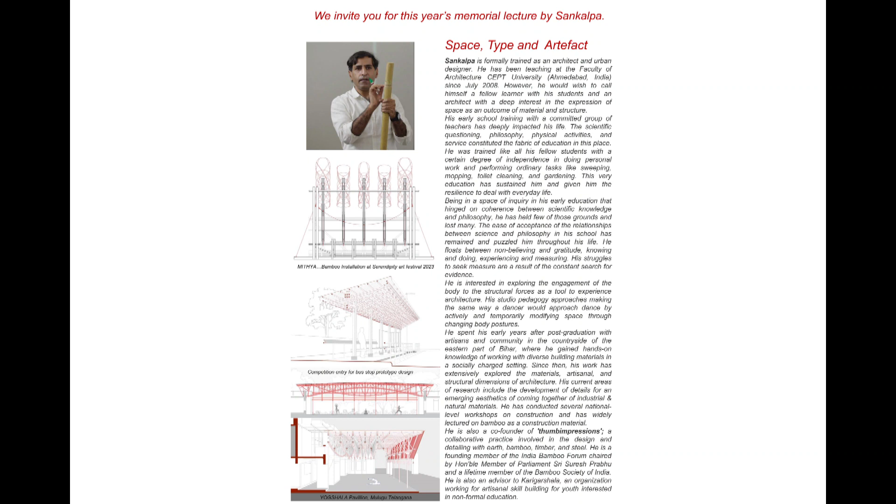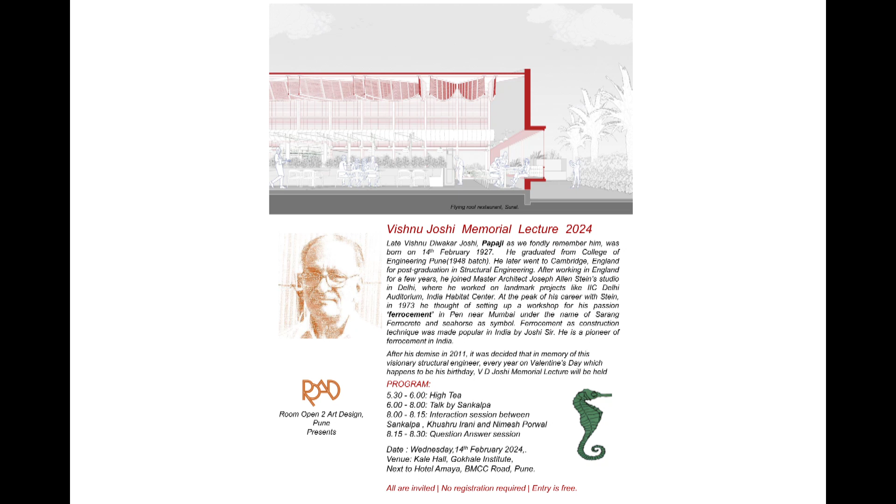We have today with us Sankalpa as today's speaker. Sankalpa is formally trained as an architect and urban designer. He has been teaching at the Faculty of Architecture, CEPT University, Ahmedabad, India, since July 2008. However, he would wish to call himself a fellow learner with his students and an architect with a deep interest in the expression of space as an outcome of material and structure. He is interested in exploring the engagement of the body to the structural forces as a tool to experience architecture. His studio pedagogy approaches making the same way a dancer would approach dance, by actively and temporarily modifying space through changing body postures. He is also a co-founder of Thumb Impressions, a collaborative practice involved in the design and detailing with earth, bamboo, timber, and steel. He is a founding member of the India Bamboo Forum, chaired by Honorable Member of Parliament Sri Suresh Prabhu, and a lifetime member of the Bamboo Society of India. He is also an advisor to Karigar Shala, an organization working for artisanal skill building for youth interested in non-formal education. I will now please request Sankalpa to take on the stage.

Being present in this wonderful evening.

I'm especially very happy and surprised that today I have a special person, Dr. Malay Patel, a client. He's a famous vascular surgeon who flew all the way from Ahmedabad to listen to this lecture. I'm extremely grateful, sir. I don't think there's a better way to acknowledge that. I acknowledge the whole ROAD team that they invited me. Thank you, Professor Joshi, Prasanna, Nimesh, and everyone else who organized this.

There are two parts to this lecture. The first part would be where I would be reading, and the second part would be where I would be showing you the work. There is a reason for it. Architects should not present their work in a format that glorifies them. It can be presented as a description of the attempt or what has been done. Critics and researchers' job is to analyze and present their findings. In a forum like this, a salesperson's speech is the least you'd expect from me. Therefore, my job here is to take you on a journey of the intellectual concerns we deal with today in academics and practice.

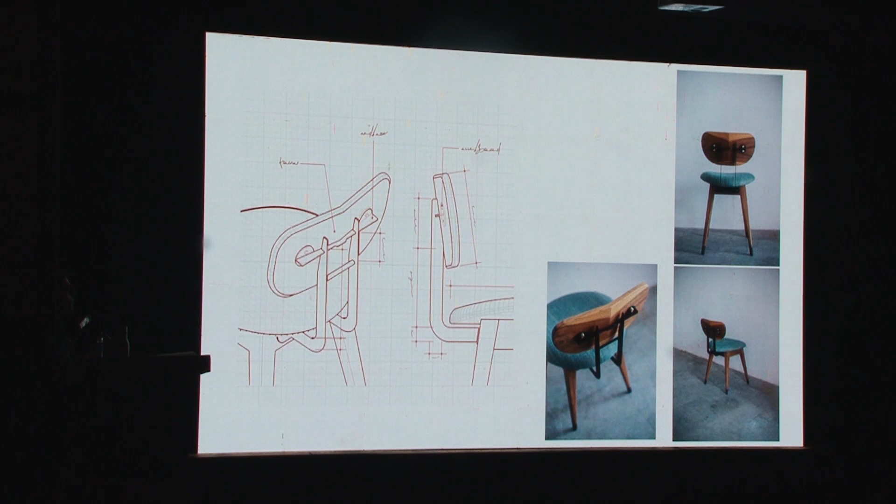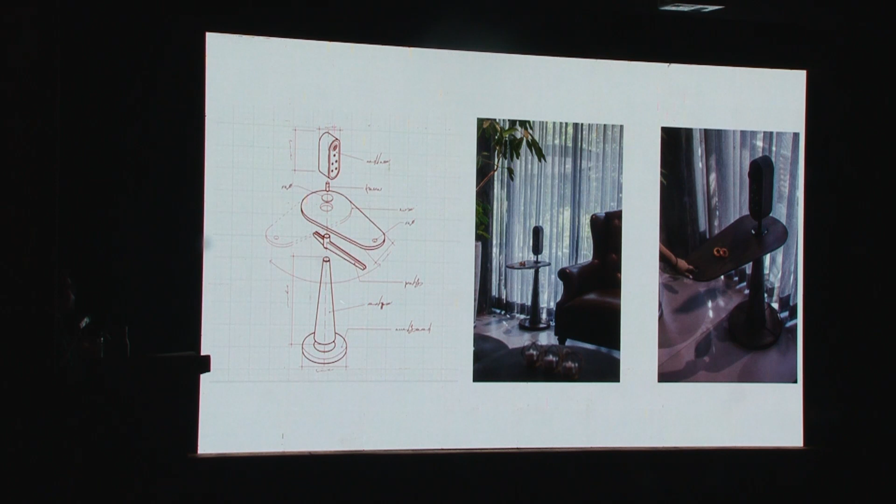As I said, we are constantly trying to explore the relationship between construction, structure, and material. If you look at the way steel is handled, steel is supposed to give us far more elegance than when we use timber. So the mixing of steel is purposefully done to make it lighter, and obviously it needs to ergonomically work. These are some other examples of it. If you can look, we do get into mechanical details wherever it is necessary. This is a swing that has become suddenly quite viral across the world now.

We had more than 1 million views of it, and we have got now so much interest across the globe to get some of these things.

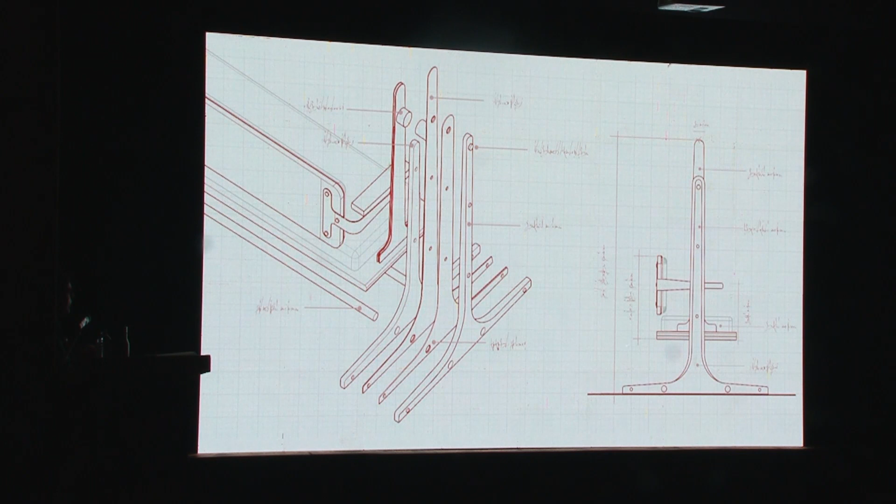Basically, it's a combination of timber and steel. Steel is a very good material to combine with natural material because it's isotropic, and isotropic materials work very well in all directions. Any natural material is generally not as good isotropic as steel. As you move from steel to timber to bamboo, it becomes highly anisotropic.

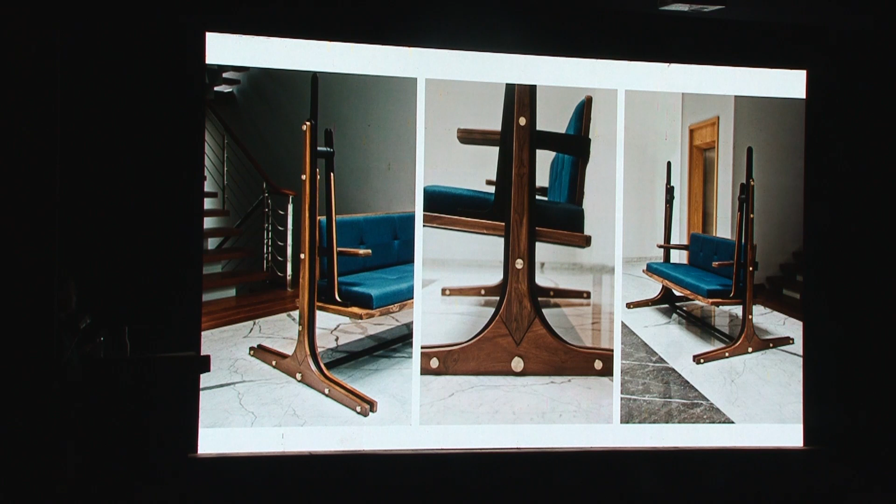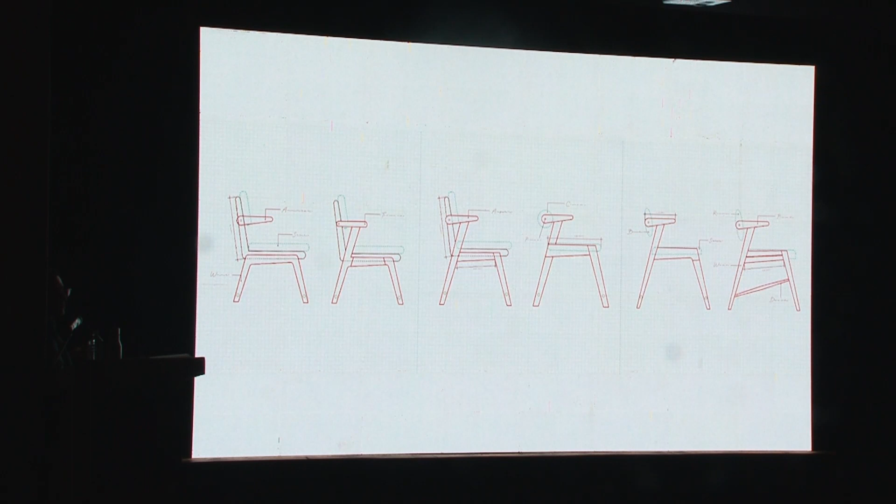Some of the work we have been doing in furniture includes a quite famous chair, becoming so popular that we've tried producing 200, 300 versions of it. It's basically a work desk where the back part rotates, so it's called a beak chair. This part rotates and creates a lot of comfort. It's generally used for both dining as well as study purposes.

There is another kind of exploration where we push the limits of the material, trying to make it cantilever in a reverse way, opposite of how you'd generally find it. You can see a gap between when you sit, and how these angles are worked out for ergonomics.

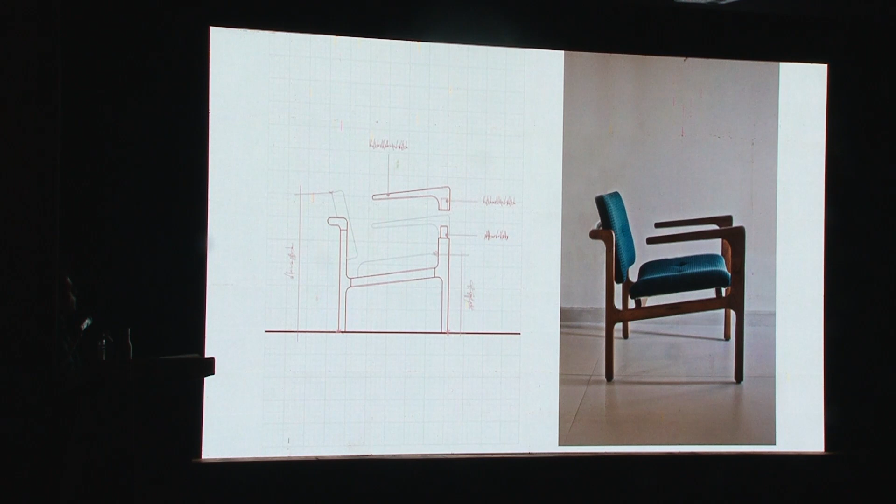These are some of the works we've been doing - swings with brass, worked out with very good mechanical joints. You can shift sides from one to the other.

This is another very popular chair. If you look at how it connects, you can also imagine why not the other way around - it's up to you to think about whether this is more correct than the other way. So these are some of the works we've been doing in comfort zones.

This is for the Taneira showroom in Delhi, where we gave some of the furniture in the showroom. Dharmesh Bhai was its interior designer.

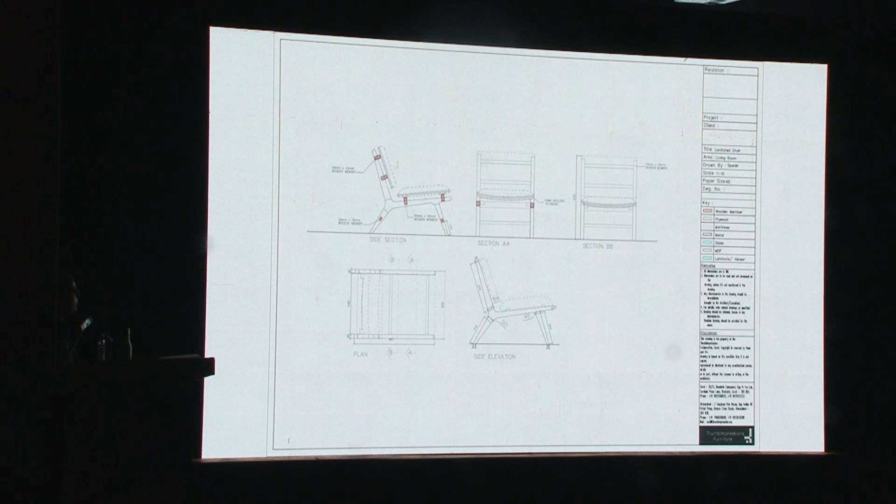Some of the way we produce drawings in the office for furniture is something like this. And this is a workshop where there are templates - our artisans still sit on the floor and then work it out.

Our other wing - the first wing was furniture, the second wing is the execution wing, called Thumb Impressions Build. We generally do construction in earth, lime, bamboo, and so on - anything which mainstream contractors will not do. That's what the Thumb Impressions Build wing does.

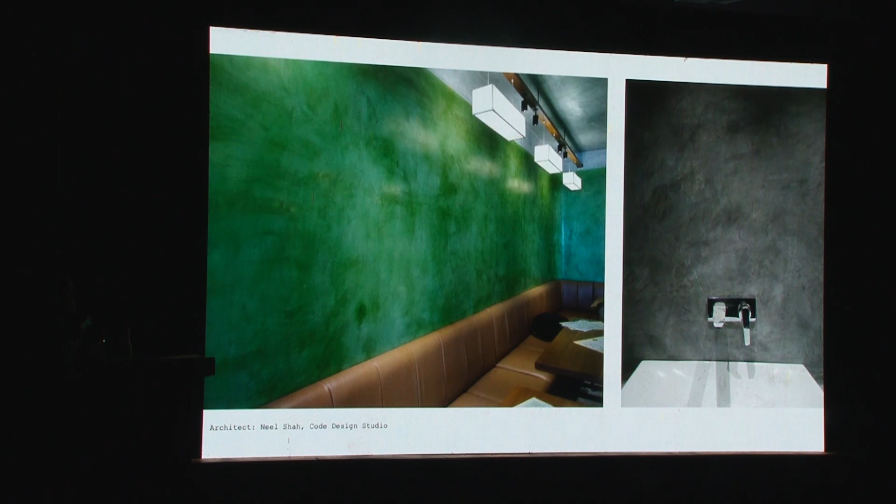This is all lime plaster of different versions that has been worked out. There are some precast works that have been done. This is rammed earth over stonework in Jaipur. This is poured earth work we did for Studio Bus Ride in Goa - these are poured earth, and they wanted color.

We do lime plaster works like some of the work you can see here. It's quite labor-intensive work, but we use very good quality lime. It takes time, but you get a very good result - some of the quality work you can see.

There is something called Tadelakt, which is much more waterproof. We do this for toilets or places where water is a problem.

Now we move to the architecture part of Thumb Impressions. As I was speaking about the type, I thought let's put some of the plans we have worked out and re-look at it from the perspective of what is changing or what remains constant as a type.

For us, there are some residences which are built, some which are still in design stage, and some which are about to begin, but we have put some of the plans. This is Malay Bhai's work, which is still going on. This is work that is supposed to start, and these two are work already on ground, and this one is already completed.

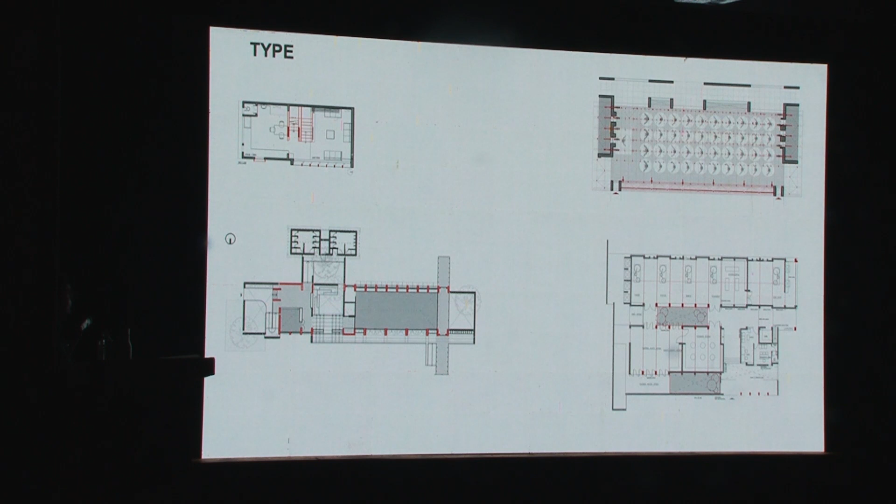If you look at this, this is a restaurant we recently worked on. The brief was that it needs to be dismantled in 10-15 years - it's on lease. So everything was steel or a material you can recycle or return back as far as possible. But again, if you look at it, there is an in-between space, and then there are these relationships.

This is a residence in Kota we are doing. This is the first time we are working with a situation where at least 3 sides is where movement happens around the court. One of the problems is that resolving a court is a very difficult thing - to bring it in and resolve it becomes very difficult. So we have still not reached a point where we have all 4 sides worked out. We have got 2 sides worked out, now 3 sides. We have not reached a level with 4 sides.

Now, in this case again, we have reached a point where there is this court, and a movement which traverses here, and this is open to sky. And these are the 2 relationships that you build.

This is Malay Bhai's house, he is present. In his case, there are 2 open spaces dispersed outside onto the 2 edges because of the nature of activity wanted. On one hand he wants this to be exclusive, at peace, pristine, silent, and on the other hand he wants this to be public. So if you look at it, this is again a closed space, it almost tucks inside, goes and hides itself outside, whereas this completely opens up. So one becomes the public, and then there are smaller open spaces which are worked out.

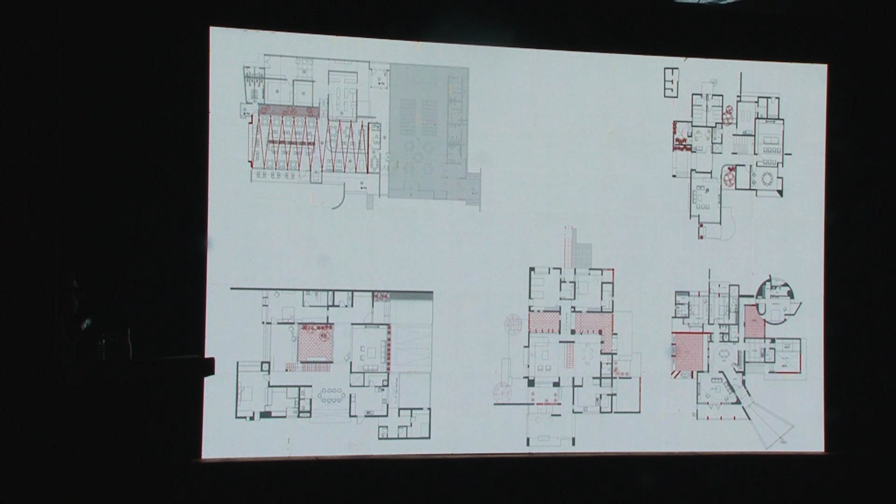So this is the Yogshala project. As I was discussing earlier, every time we are doing a project, the program and the structure are almost more simultaneous than the material. For us, what is very important is the span, because it's the span which has far more freedom than when you are working with enclosures and bearing members. Because when working with bearing members, the plan and organization starts working, whereas when it is span, you are far more free.

Let me explain how it works. Bamboo has low modulus of elasticity and high tensile strength. Because of low modulus of elasticity, you will hardly find a bamboo structure which is straight - most bamboo structures are curved. You make it into a curve, in spite of high tensile strength, because you don't want to deal with low modulus of elasticity. It's very difficult to deal with.

So in this Yogshala, apart from the idea that it has to have an expression, there is an arch here, this one, and this one - if you see, it's an independent truss which has got a slight cambering. The cambering comes out of the on-site experiment.

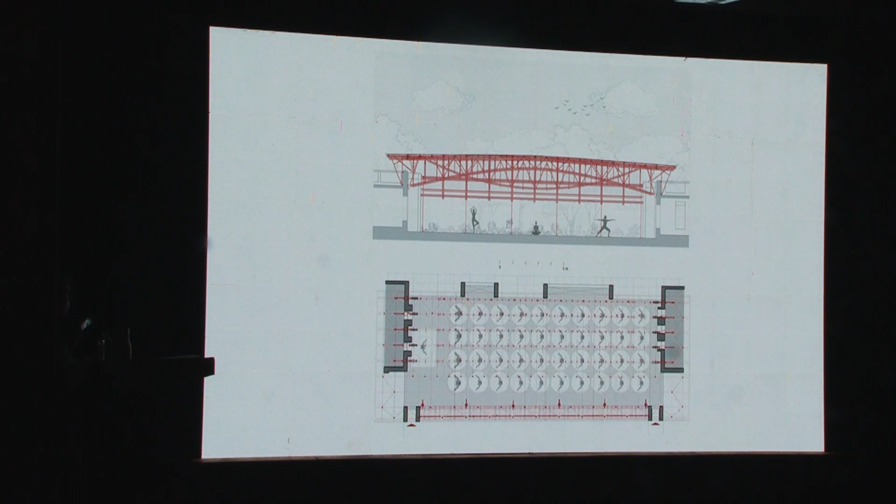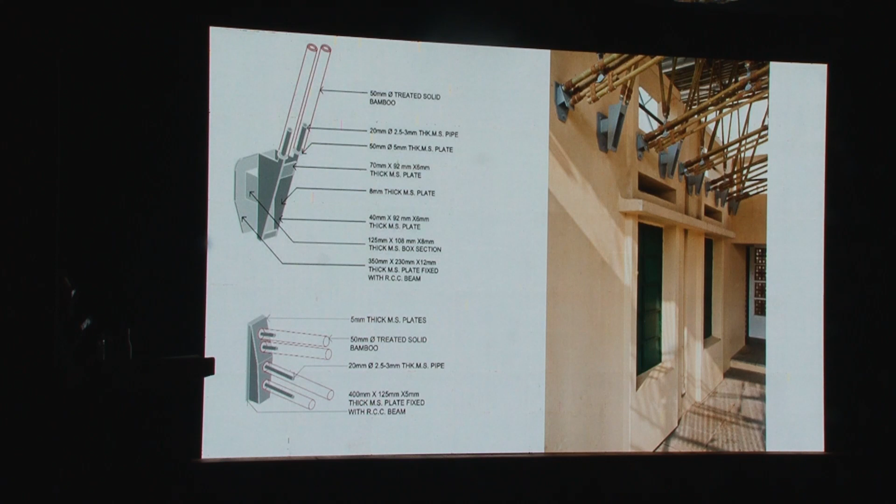These are some of the details. I'll explain further. These are all customized details, because one of the areas we are working on is trying to standardize a fastener system in bamboo so that it can be used more freely in urban areas. So these are some of the details showing how we are working with saddle details, etc.

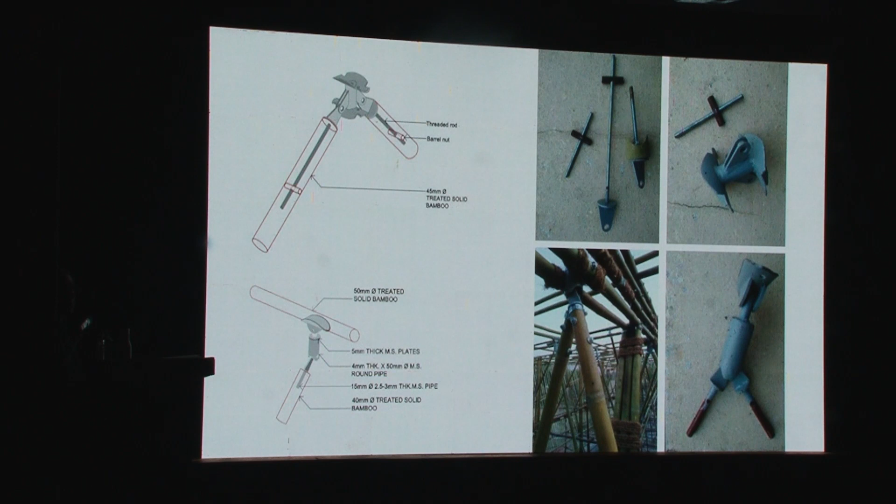This is this detail. These are for when you are combining two bamboos which are coming at an angle, but you have created a movement because you need some tolerance to work with bamboo. Bamboo is not perfectly straight. So this is what the section would look like.

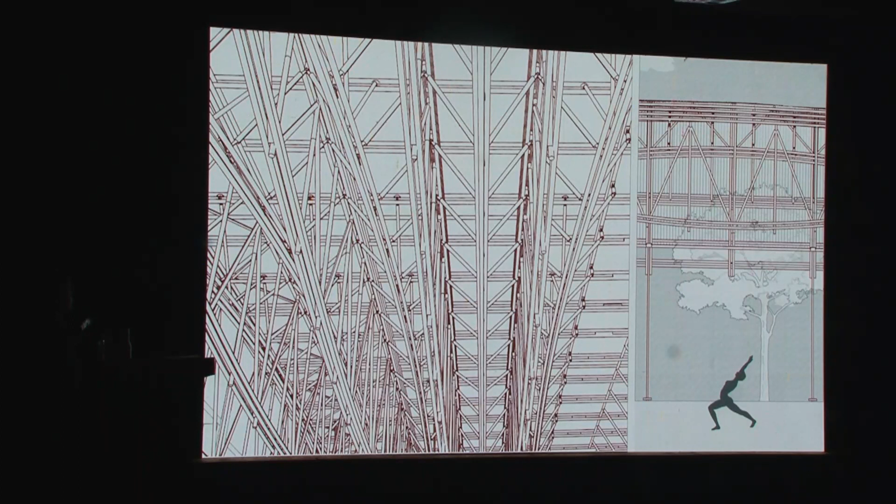This is what you can see, and this is what you can experience. Now let me explain here.

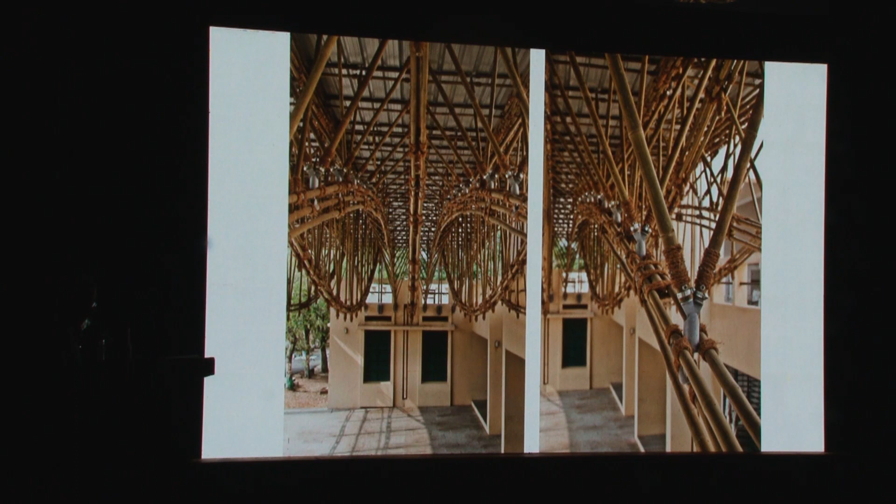This arch is a redundancy that has been added to the structure. It is not working right now. It will start working when the truss system starts sagging. So one layer of precaution is by creating a cambering, and the second layer is by adding redundancy through the arch.

From the top chord of the trusses, these diagonal members come and rest on the arch, and that's what you see as the poetics. So it emerges from the logic of the structure, and at the same time from the demand that we need to make something like this, and also from a program.

Architects are compelled to write. We have been also compelled to write. So there is a logic that we have tried to weave between yoga and this, which I'll not explain right now because I'm trying to explain the thought process going on behind it.

It's around 74 feet, around 23 point some meters — one of the largest spanning structures in bamboo in the world. I mean, at least among the top two or three it should be.

And then of course to connect differently, so these are abstract, but if you see, these are yoga postures, used to connect symbolically to people who otherwise would find it difficult to connect with abstract ideas.

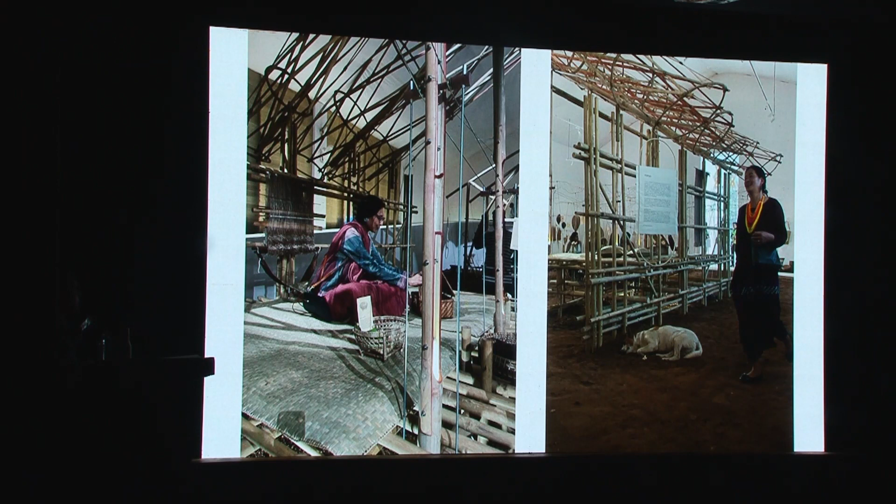Now there are other things also here. Let me see if I will draw it. I'm surprised. Okay, I think I'll come back. There would be some images of that.

This is a project which is work in progress all the time, because it's an NGO campus and they keep on raising money to make it. So every time they raise money, they do a little bit more. Again, it's a bamboo structure, and this is a truss, but the span is less, so we don't have to cross-triangulate it. So this is the quality of space that you get.

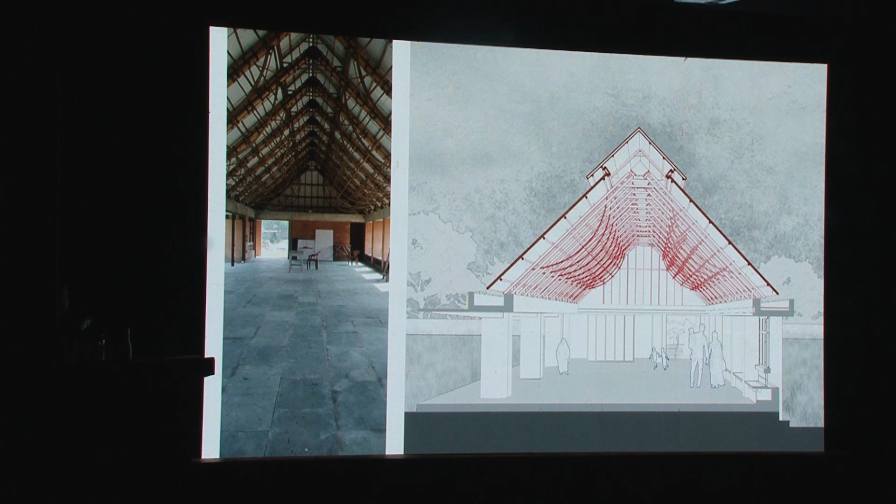Now there is careful consideration, because we are thinking about how to manipulate the plan to create a different span at the top. Because the moment you increase the span here, your beam depth is going to change, otherwise it will be compensated by reinforcement. So constantly we are trying to figure out how to integrate this, and that's how it gets integrated.

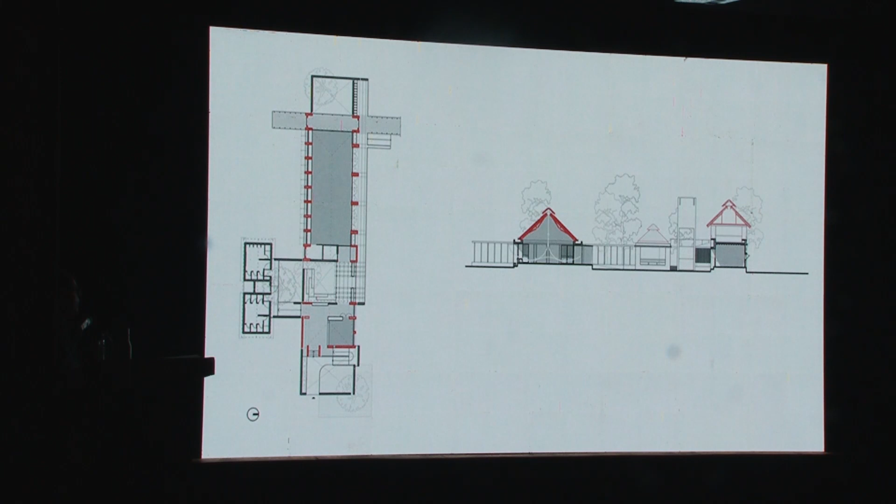And then you see the expression of it. So in this case, it is integrated through reinforcement and not through the depth of the span. The depth of the span remains constant here to work with other logics. Also, on the end, we have cross-bracing because it's a region of seismic zone 3 and also a region of high wind velocity.

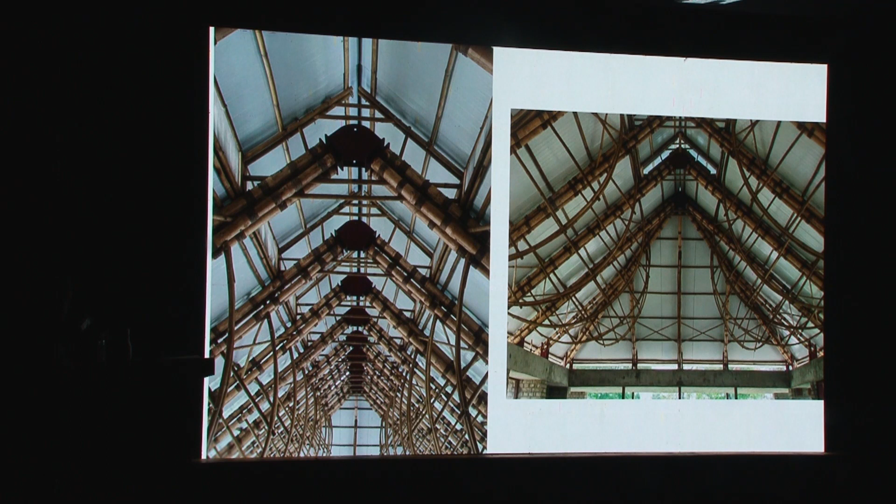This is our interest in trying to utilize the tension property of bamboo, because the tension property of bamboo is as good as steel, but the problem is that the lignin which binds the fibers of the bamboo is weaker. So even before you are able to extract the maximum tensile strength of the bamboo, it will fail in joinery. You will never be able to gain the maximum potential of it.

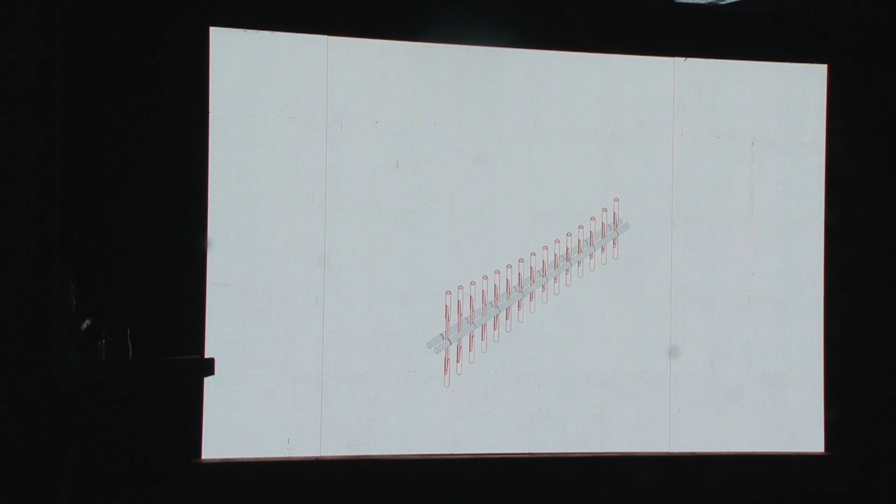And then how do you engineer bamboo? How do you develop its components, other parts of it? So you see now the relationship here - the vertical member, and then the cables that are going, which are made out of splits. That's all the details. If you look at it, there is also a detail here where there is a bolt and it is touching a line. It's not touching this part.

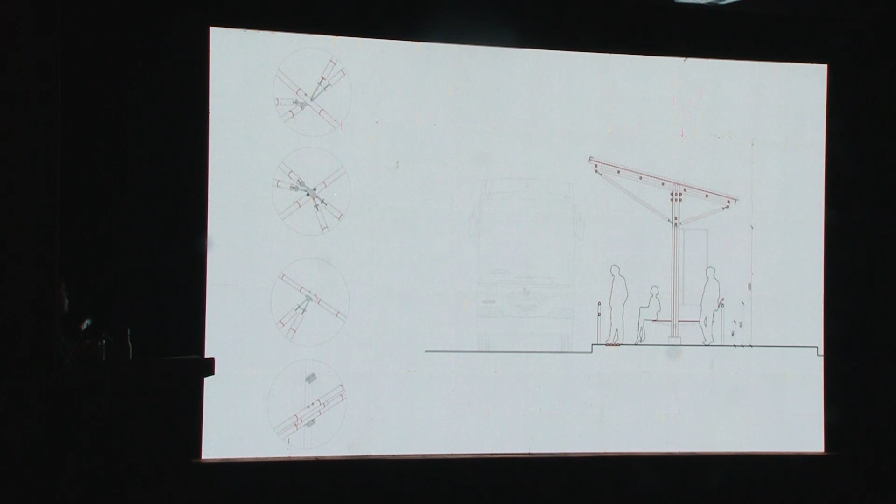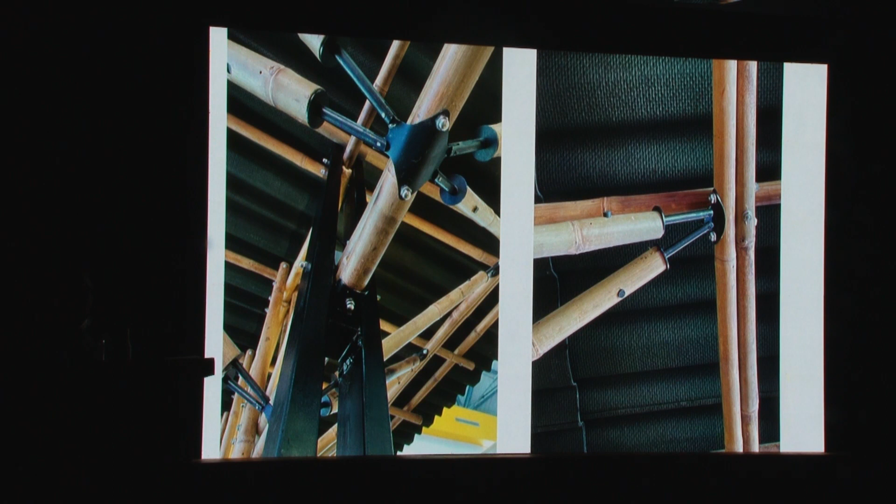This is another attempt to put bamboo in an urban infrastructure project. This is a workshop which we did for Triple ID, and it was inaugurated by the Hyderabad government during that time. If you look at the details - this saddle is worked out based on the diameter of the bamboo. So you have washers of 12 number, 14 number, etc. You can have a saddle of these numbers, and based on what bamboo you select, you can bolt it and standardize it. So no customized joint is required to make this bus stop.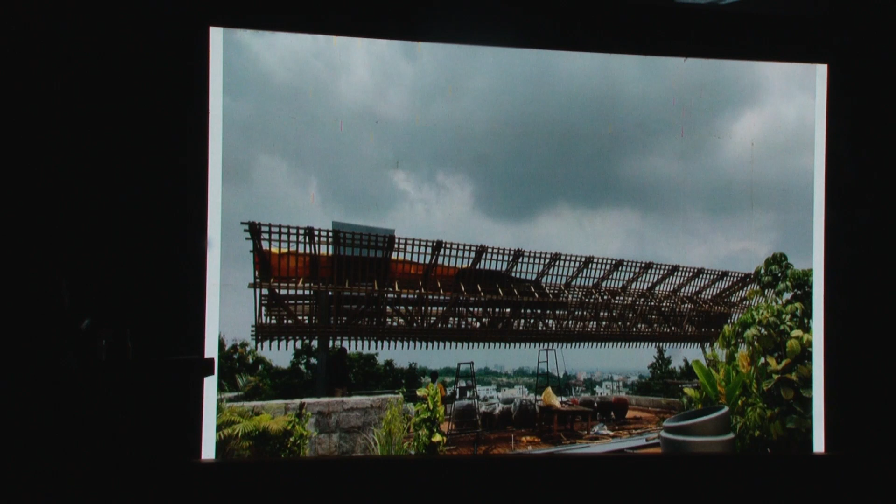Though we had also given a proposal for the council, but it didn't work, I think. This is a structure where we failed - a 13-meter post-tensioning structure in bamboo, which we post-tensioned using steel. What was happening is we were not able to balance the CG, and so it toppled towards this side with a deflection of around 20 mm. If you look at it, it is pulled by cables, and they are all highly engineered.

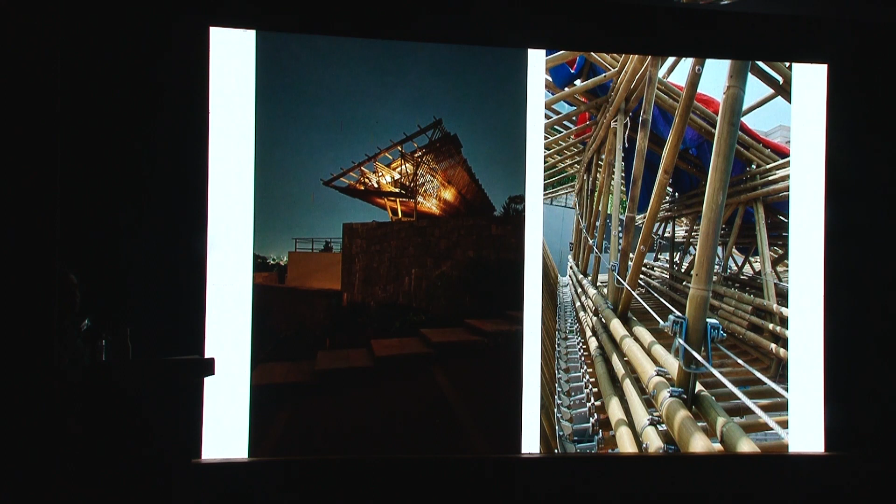If you look at all these details, all are customized. We customized all the details, worked out, but that was very unfortunate that we could not work it out, and the client didn't have that much patience to take it, because sometimes if you take a leap of faith, there are failures that will happen, and unfortunately we failed in this.

This is another roof which we are doing with Hunarshala. This is Hunarshala's office for which we did an R&D. I'll explain, and then there are a few images. This is a rafter - the rafter will bend like this. If you leave it, it will sag like that. Now there is an independent arch which comes here. You can see they are not touching.

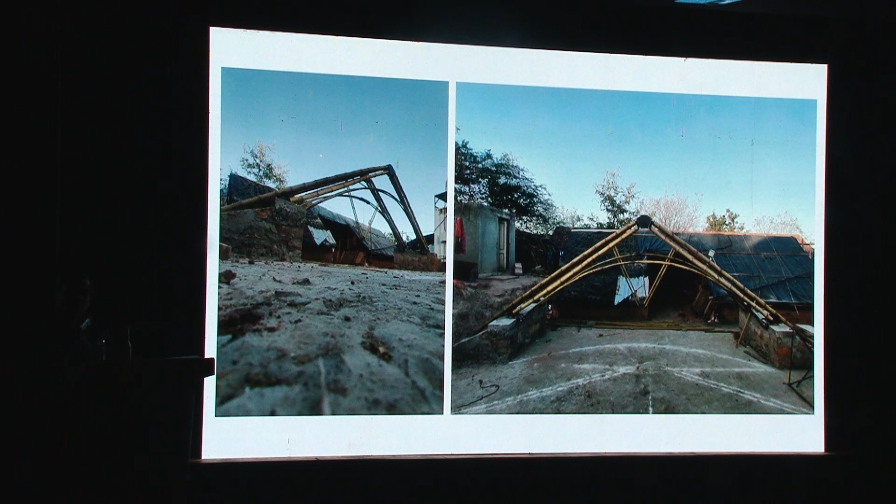And then there is this vertical member which is sliding between the arch. It is connected to the top rafter, but it is not connected to the arch. When it goes here at the bottom, from here there is a tension member which goes and connects to the arch. So what happens is that when there is sagging, redundancy is again built into the structure for future failure. Once it starts sagging, the tension starts working, and then the compression member eventually starts working. So it's an indirect load path that sort of works here. And so you get a space like this, and a space like this. The roof is inclined - we are still to document it.

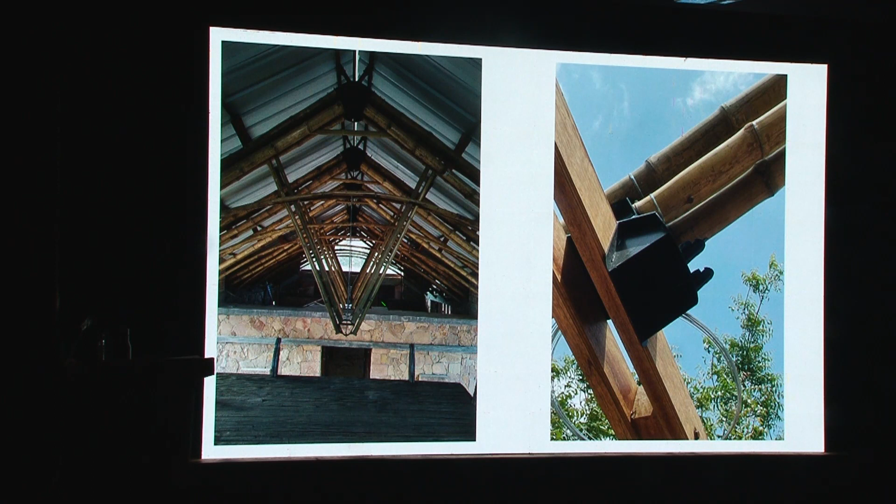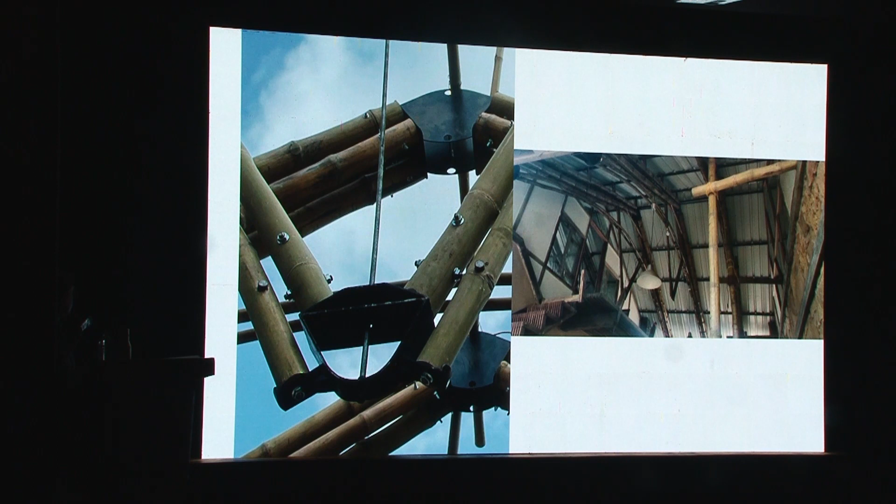And these are some of the details - again, all customized by us. The thing is, because bamboo diameter keeps changing, we have worked out a width in a way that it can change, whatever. It doesn't matter because of the nature of relationship that we have built between the curve and the square form.

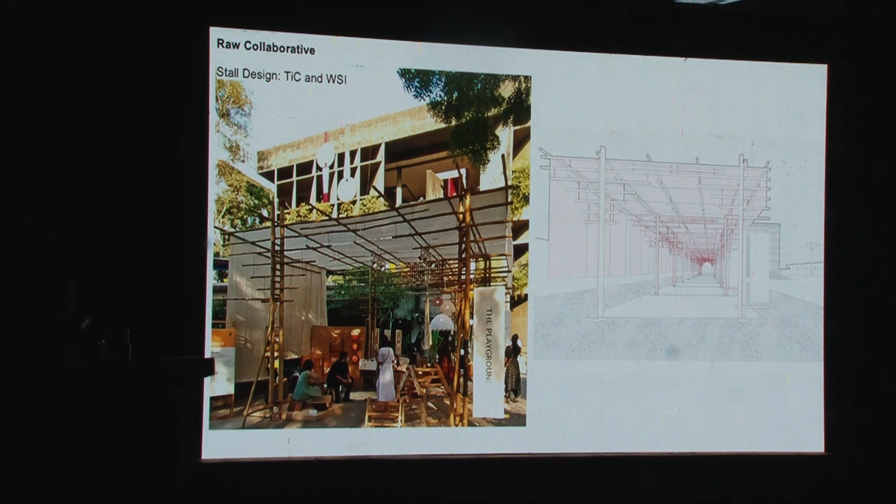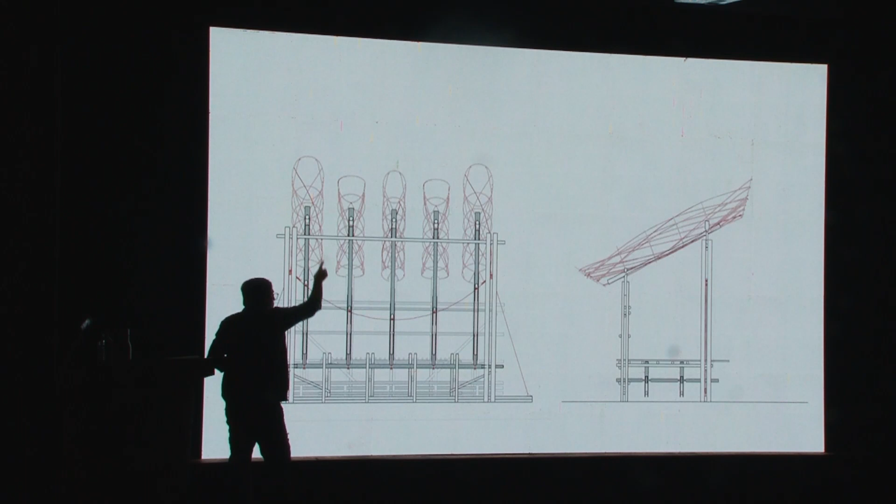Just give me one minute, I'll go close by to explain this. You see that this, if you look at it, is a beam. The bottom member, the top member, and this combines, and all of this is a beam.

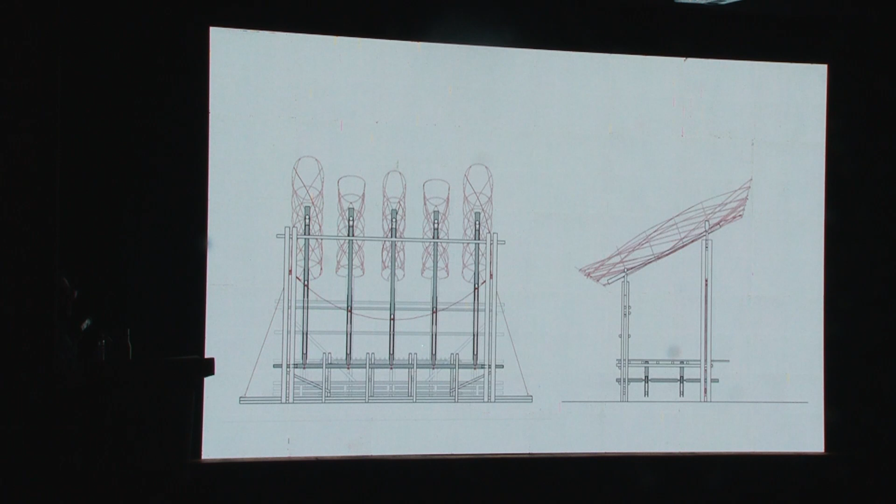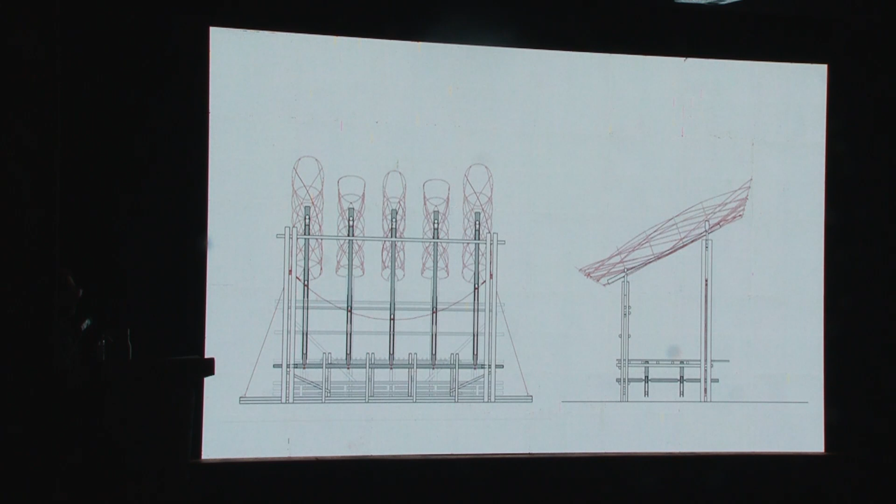Now what happens is there is material that we have removed from the vertical member. The moment you remove material, it becomes weak. What we have done is taken rods from here, connected it to the tension member, which is a cable, and connected it back. So there is a pull force from the down to take the load onto it. So it works both as an enclosure as well as a force diagram.

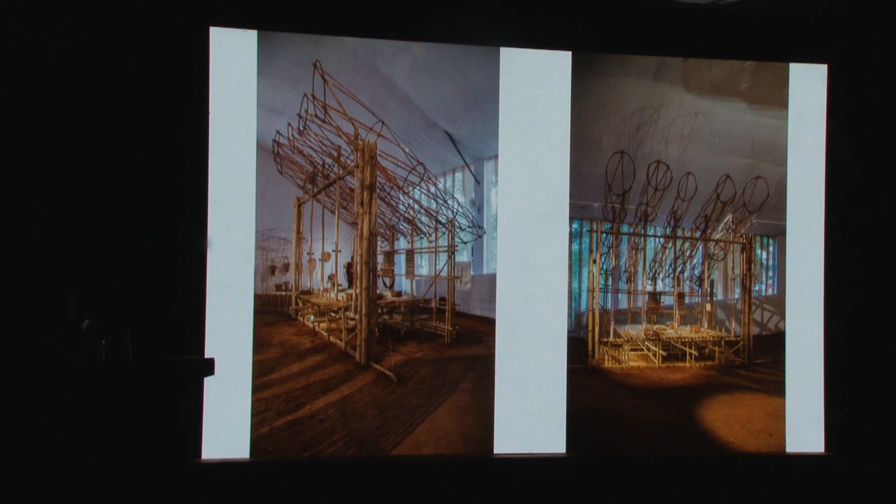So if you see this, you can see the path of it. There are more details I'll show you. This is the bottom portion from where this rod comes in. This is the material that has been removed, and this is how the connection happens before it is taken to the end and then anchored to the ground.

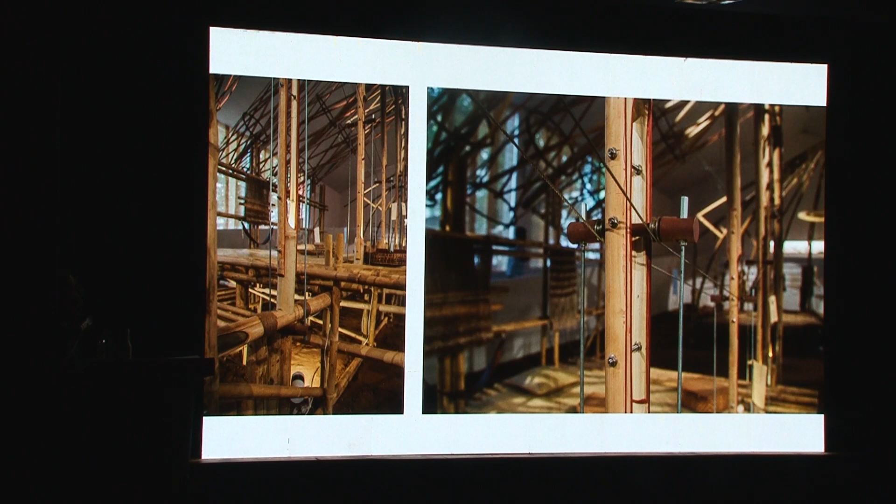And these are some of the details that again we have customized. Some of the elements you can see.

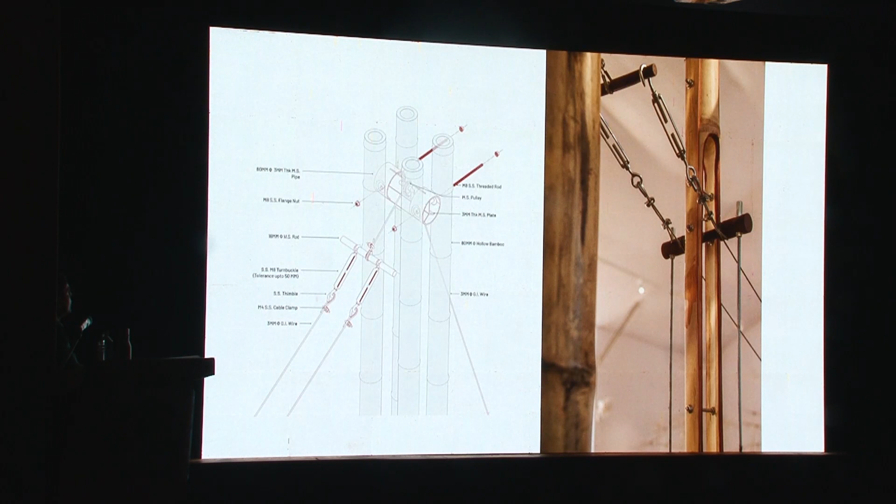This is another detail, if you can see. We have removed material to make the bamboo weak, to then see what would be the potential that it can take. So it can take enough weight.

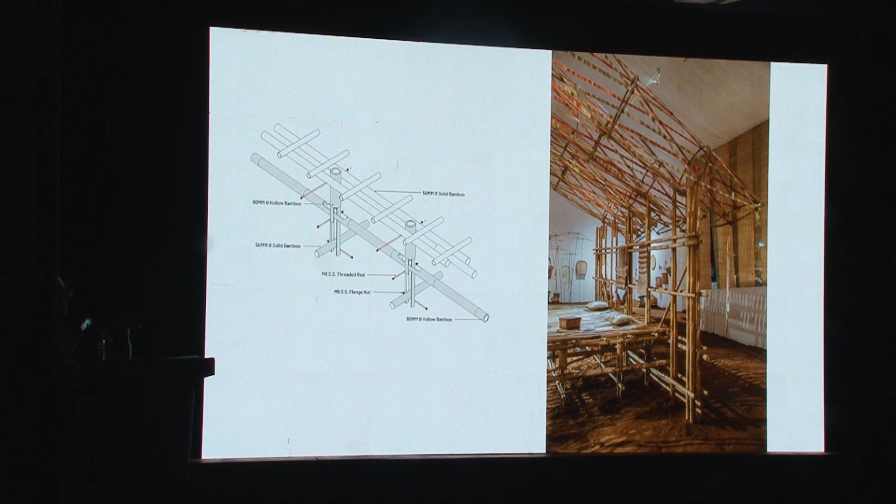So we are also trying to constantly learn and think, because it was an installation, people were sitting, but it was short term, so we could take more risks. And so this is what the detail would be.

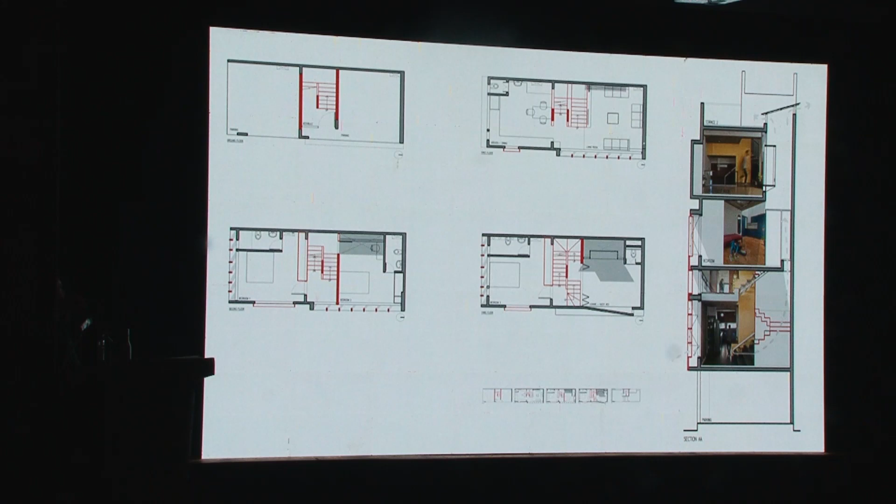And then you see that we have taken light as much as wherever we can, and there are places where we could not manage, because there are different interests of people who are also living in the house. So our idea was to take it till the living room.

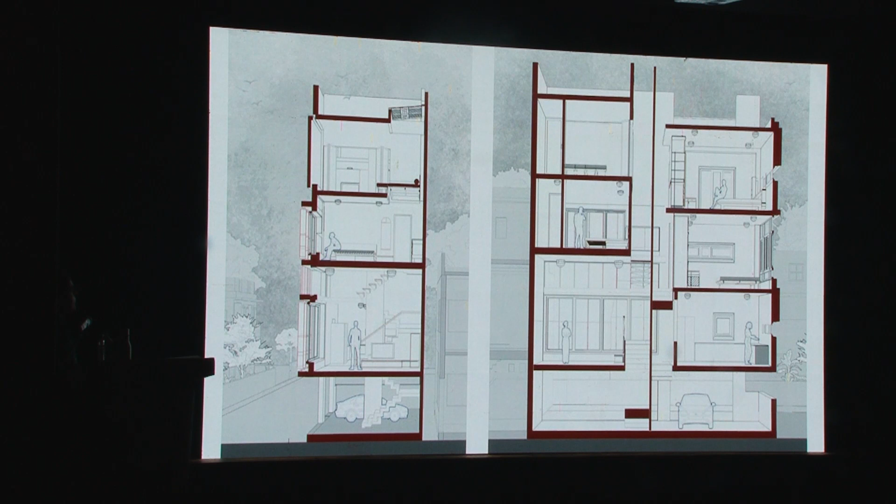And then of course whatever element you get in steel etc., you celebrate. In this case what we wanted to do is an asymmetric force diagram, and there are two angle sections working here, and these are some of the spaces.

I think the image has been compressed, but this is a factory building, very low budget, but we just completed it. It's a masala factory.

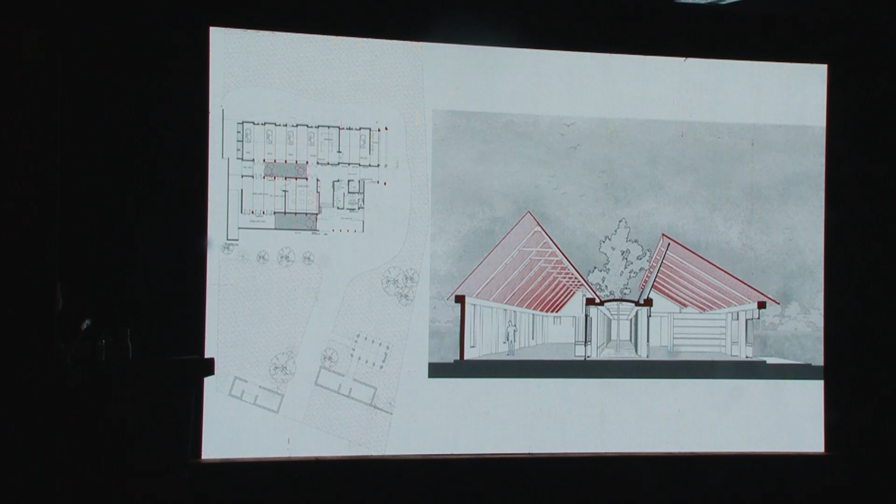This part is where the machines are. This part is where all storage and admin are. And in between is where the court is, where you can spill out and sort of work.

Again here what we did was we have used a flitch section, but instead of curving the timber, we are curving the steel. So the force diagram here, you look at the steel, it is curved and then it is stiffened. And then the timber comes on both sides, and we have not curved the timber.

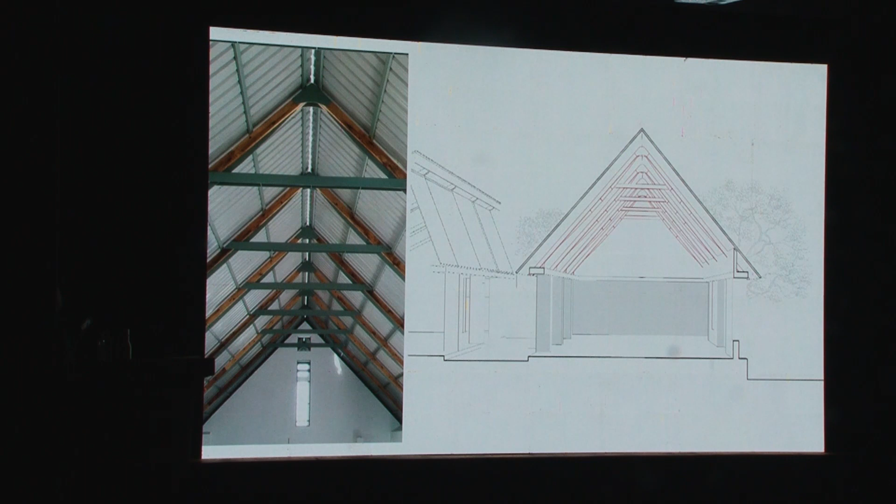And then you can see some of the spaces. Of course there are bolts. Whatever we can manage, we try to do it. You can see the detail of the other roof, again stiffened.

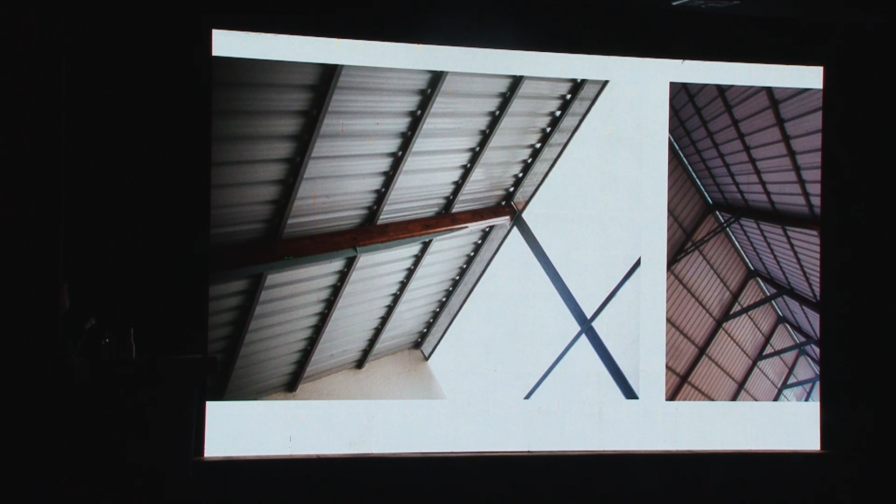It's just completed, a restaurant in Surat, the Flying Roof restaurant. So what we have done is profiled the section with a force diagram. We have used perforated sheet for that.

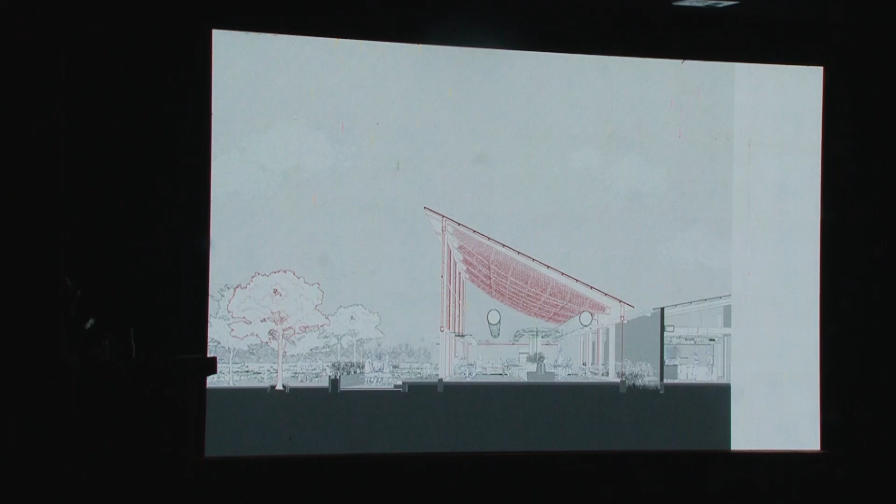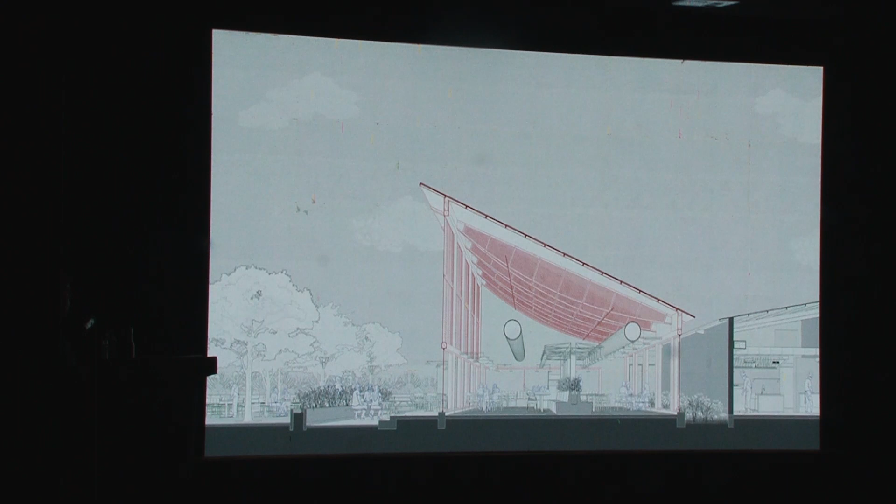So you see that this is the restaurant portion, and this is the kitchen portion, and then you can spill to the other side. This is the way it connects. And these are perforated sheets which are stiffened.

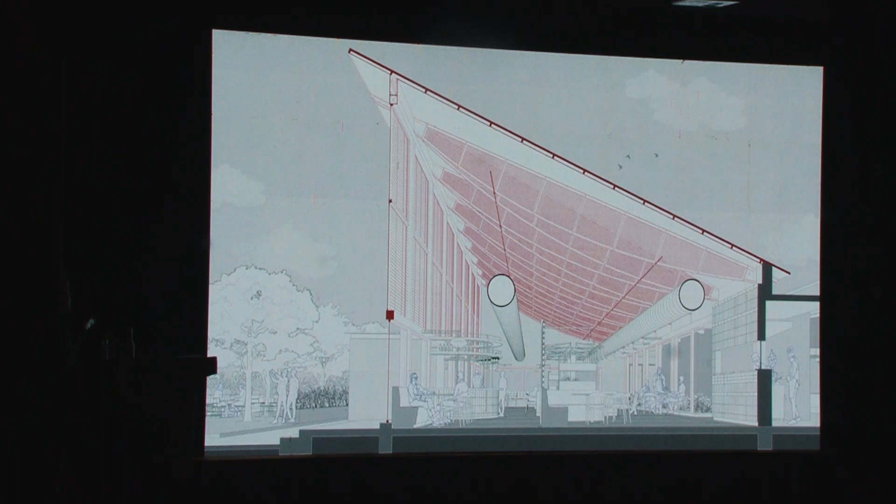This from the other side. We are thinking day and night about this, because it's at the urban edge. So we are thinking about how to allow maximum flow of at least the view into this, because this is transparent. At night it sort of lights up and shines.

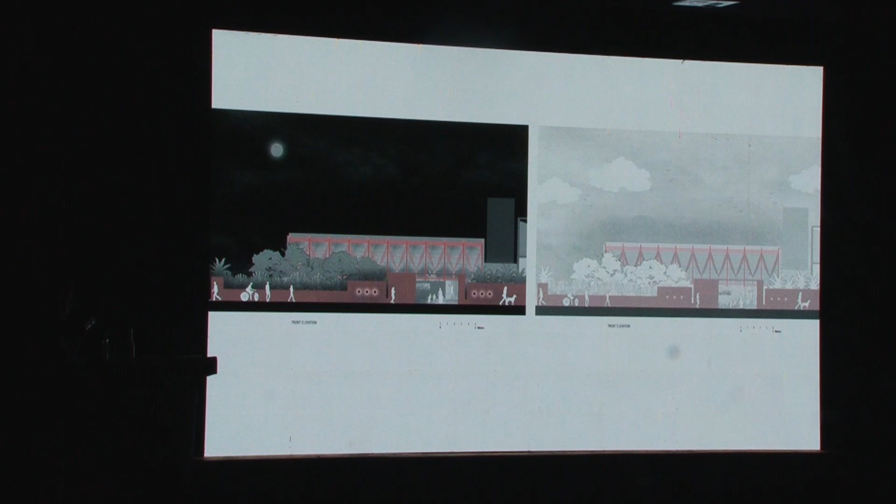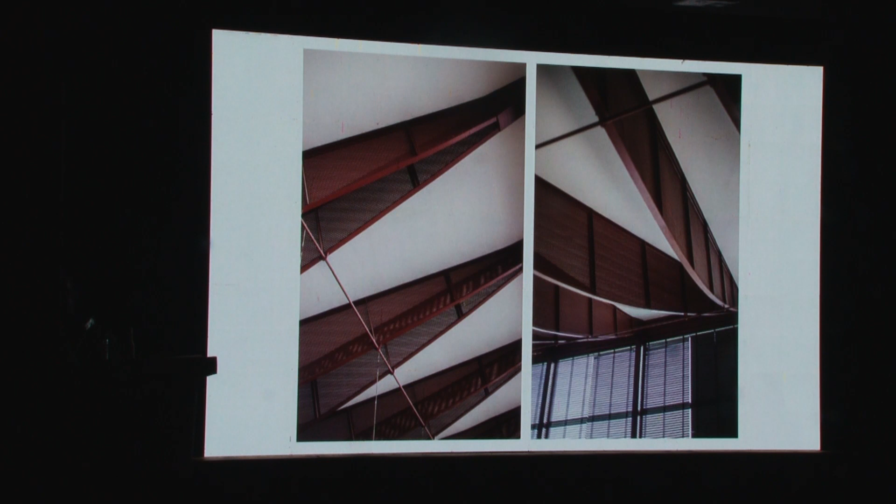And this is its public interface, and this is what the section looks like. So this is around, I think, 5 m, 8 m.